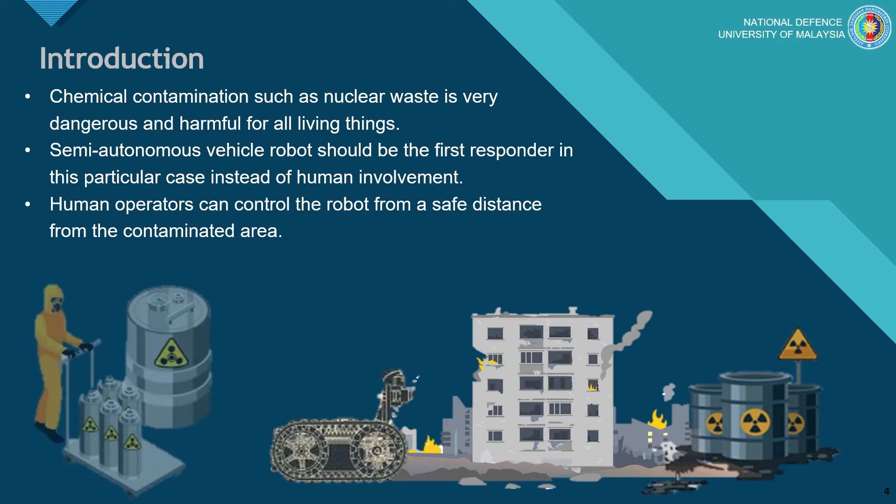In such case, a semi-autonomous vehicle robot should be the first responder instead of human involvement. This is because the robot is capable to perceive, grasp, cut, and manipulate depending on the type of chemical waste. Other than that, the tracked vehicle robot is capable of adapting to a variety of complex surfaces and environments. Once the waste was discovered, the substance can then be stored safely or disposed appropriately.

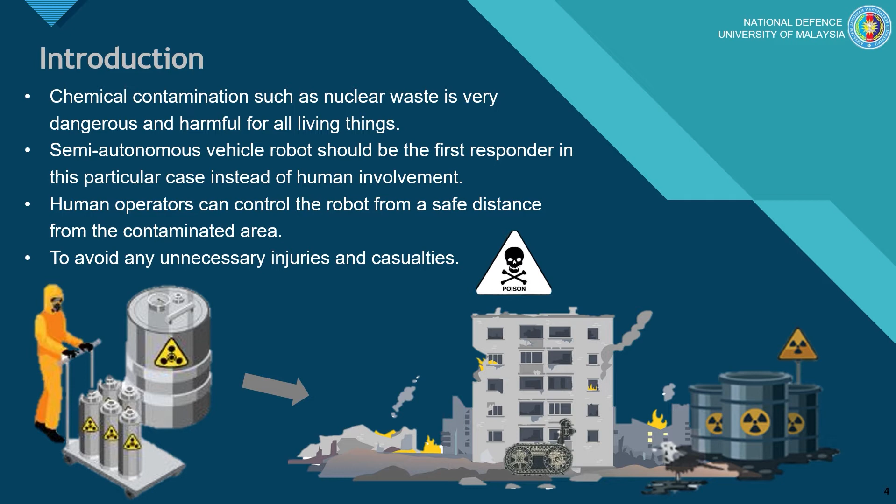On March 11, 2011, Eastern Japan experienced one of the worst earthquakes and tsunamis, causing heavy casualties and losses. In addition, the Daiichi nuclear power station was also damaged, resulting in the release of radioactive material. In such an event, the use of a remotely operated robot may be a good alternative as it can reduce the risk towards the human operators.

Problem statement. The technology to deploy remotely operated vehicles to replace human operators is readily available, but it must be equipped with enough capability to ensure good information can be extracted so accurate decision and planning can be executed successfully. One of the capabilities is to be able to maneuver on an unknown terrain, possibly harmful and compromised area.

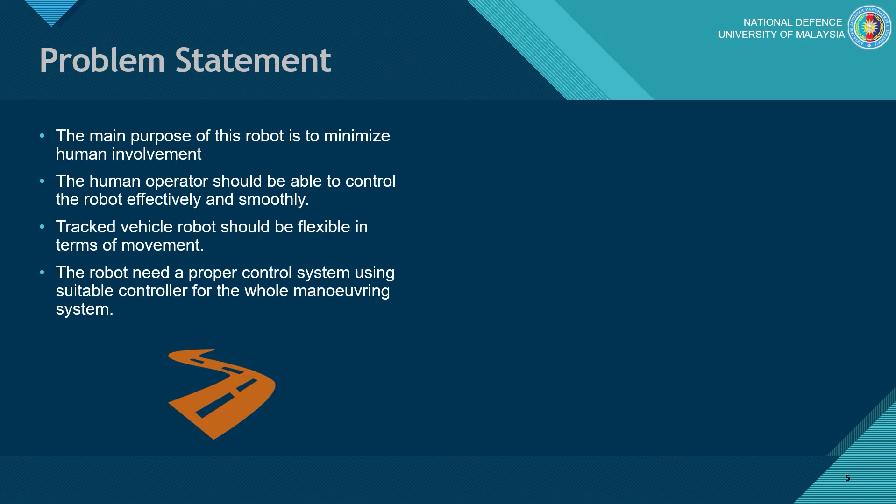Thus, the robot must be flexible in terms of its movement, so it can maneuver on various types of surface such as muddy, grassy or sandy terrain without compromising the outcome of the operation. In order to achieve that, the robot must be equipped with a proper control system by using a suitable controller. This is because one of the crucial structure designs of this robot is the control system for the maneuvering of the robot.

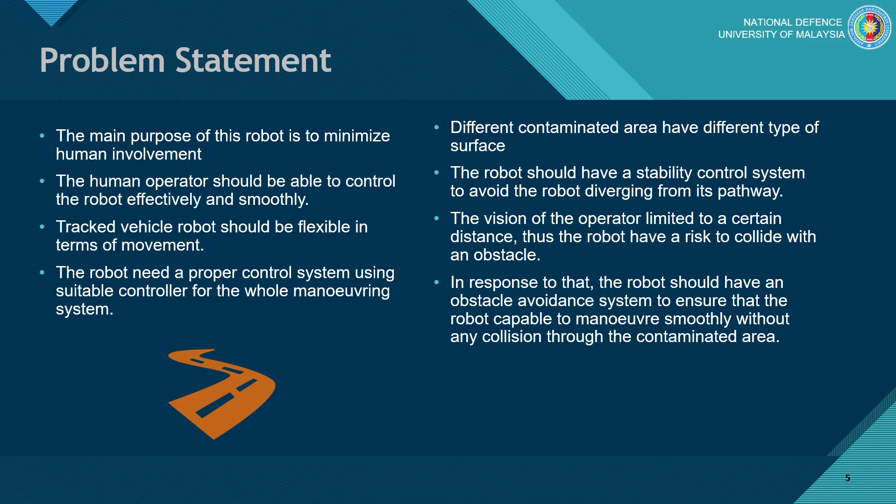In addition, this semi-autonomous robot must have the capability to steer away from obstacles. In other words, this mobile operator must also be equipped with an obstacle avoidance system. Finally, uneven surfaces will influence the level of stability of the robot and will affect the performance of the motors. Therefore, this semi-autonomous robot must be equipped with a stability control system which will enhance the capability of the robot to move and maneuver through various types of terrain.

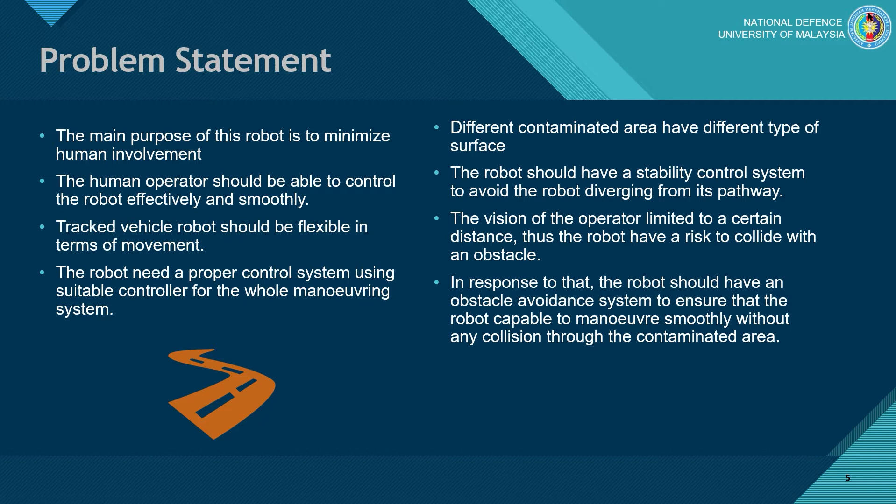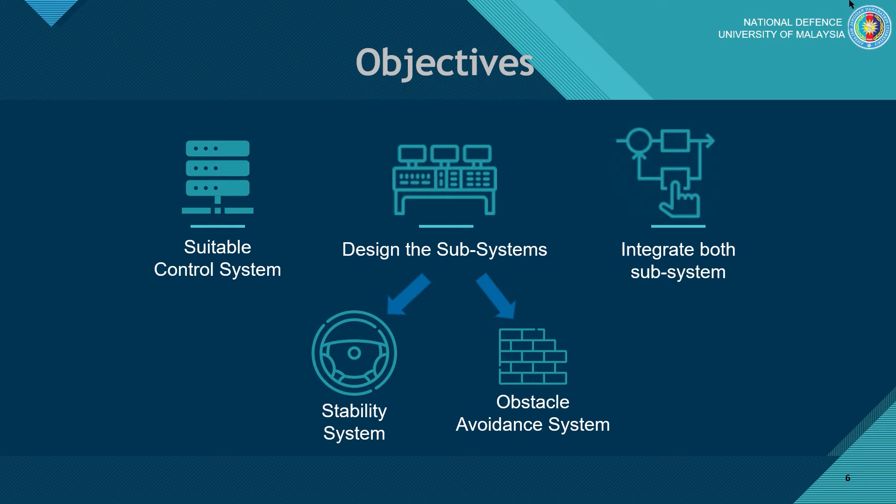Objectives. There are three objectives for this research project. First, to study and design the suitable control system for the whole tracked vehicle robot in terms of movement. Second, to create and design the subsystems, which are the stability system and the obstacle avoidance system. Finally, the third objective is to integrate all the subsystems with the main control system and evaluate the performance of the robot.

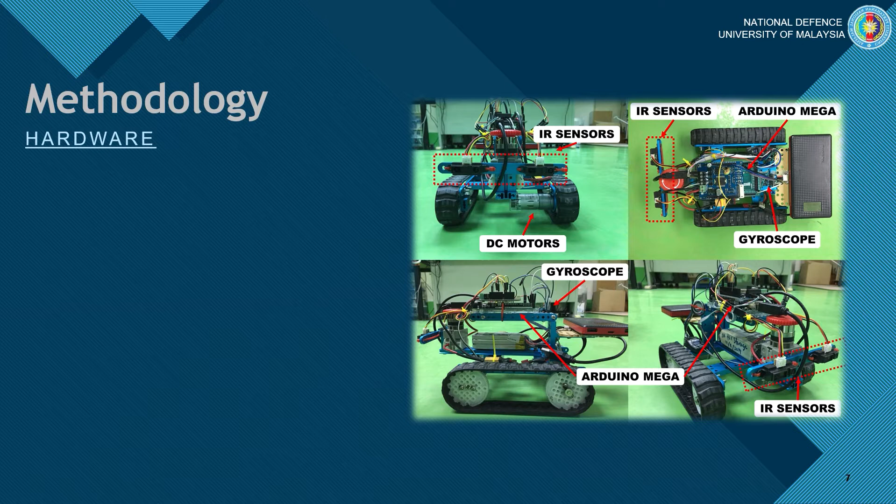Methodology. In this research, a downscaled fully functional tracked vehicle robot was developed and designed which consists of similar parts of an actual 200 kg tracked vehicle robot. All the electrical components such as sensors, microcontroller, and transceiver used on this tracked vehicle robot were chosen attentively and able to be implemented on the actual scale in the future.

The mechanical parts, on the other hand, are a simplified version of a tracked vehicle that consists of toy-grade materials, where the chassis or body frame is built from aluminium building blocks and the track assembly is made from rubber. The tracked vehicle is controlled by using DC motors connected to each side. The simple input-output relationship of the implementation is represented by the figure on the bottom left side of the slide, where Arduino Mega was used as a microcontroller for this tracked vehicle robot.

It is integrated with the two DC motors mounted for the left and right side respectively. Two infrared sensors were used on the robot to act as the collision avoidance system, while the gyroscope MPU6050 was used to provide real-time states of the vehicle's orientation to represent the stability system.

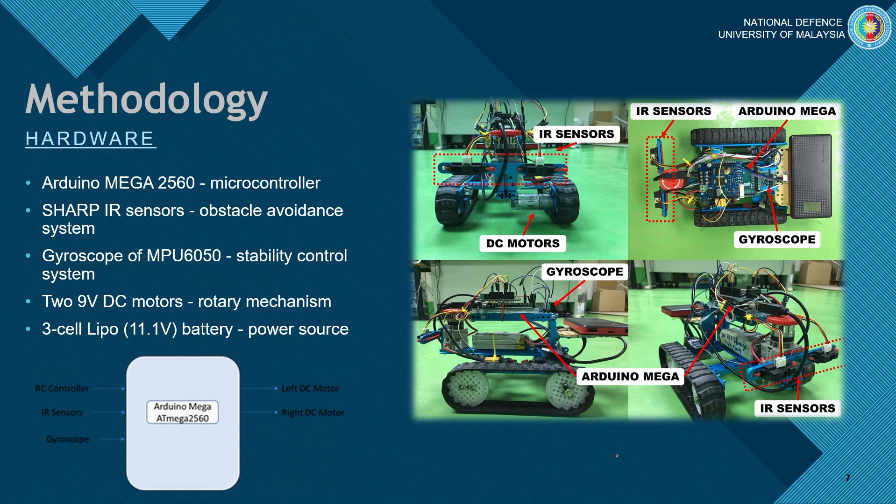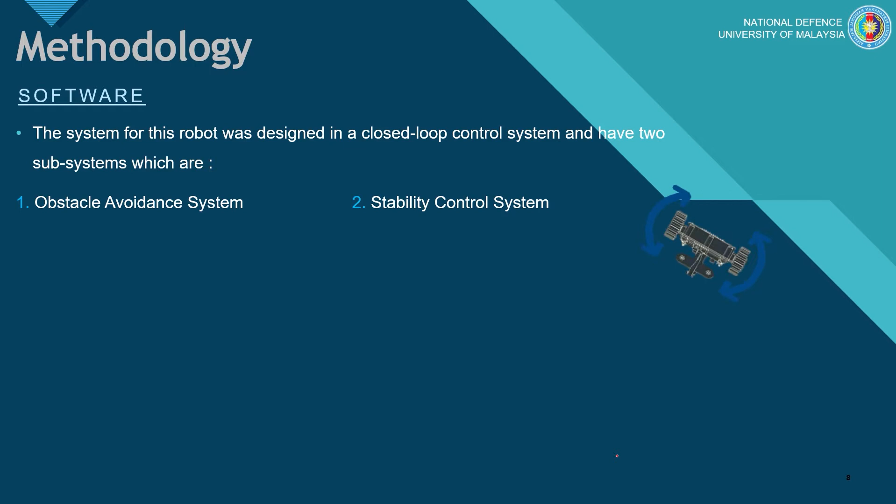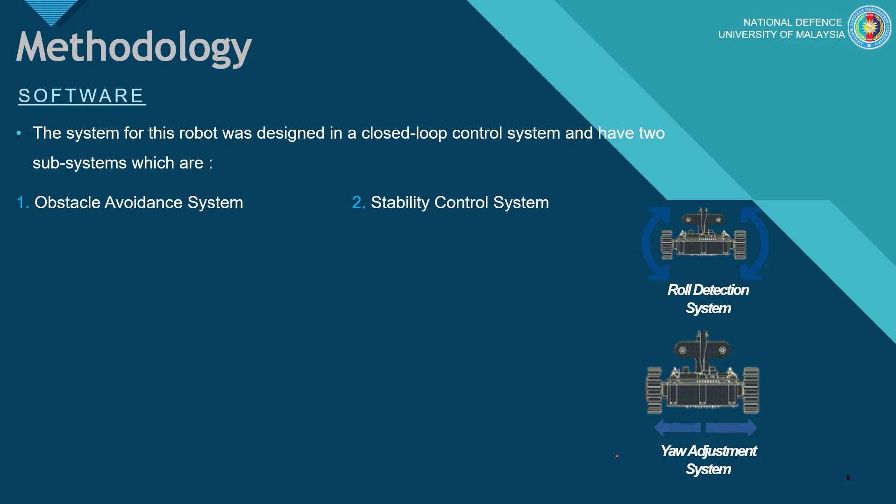The system for this tracked vehicle robot was designed to be a closed-loop control system which automatically regulates all the process for the collision avoidance and the stability control. Plus, the whole system for this tracked vehicle robot can be divided into three subsystems, which are collision avoidance, yaw adjustment, and roll detection system.

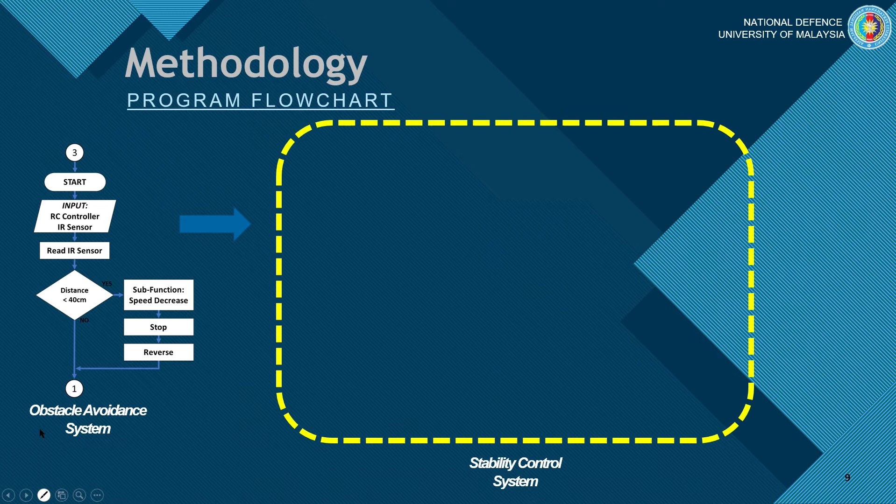Program flowchart. The program for the whole system on the robot can be divided into three flowcharts, and each flowchart process represents the three subsystems. In each process, there will be a requirement or a condition that needs to be fulfilled. If not, it will move on to the next process. The number in each subsystem symbolizes the continuity of the whole system.

The first one is the collision avoidance subsystem flowchart. If the IR sensor detected an obstacle located less than 40 cm from the robot, the process proceeds to a subfunction. In the subfunction, the input from the IR sensors will go through a PID process that will come out with an output, which is the speed of the DC motors. This output overrides the RC controller input. Then the tracked vehicle will reverse for 1 second and continue to the next process.

The second one is the yaw adjustment subsystem flowchart. The input for this system is the yaw reading of the gyroscope of the MPU6050 sensor. If the readings show positive or negative values, this indicates the tracked vehicle robot is diverging from its path and moving towards the right or the left sides.

So whenever the yaw readings are past the limit that has been set, the process will proceed to a subfunction which will undergo a PID process as an input. The output of this process is that the speed of the right or the left side of the DC motors will decrease depending on the yaw readings.

The third and the last flowchart in this process is the roll detection subsystem flowchart. In this process, the roll readings from the gyroscope are the input alongside the RC controller. There are two conditions in this case. The first one is when the tracked vehicle robot is in the warning level state, and the second one is where the robot is in the dangerous level. The positive and the negative values of the readings indicate that the robot is on an inclined surface on the right or the left sides of the tracked vehicle robot.

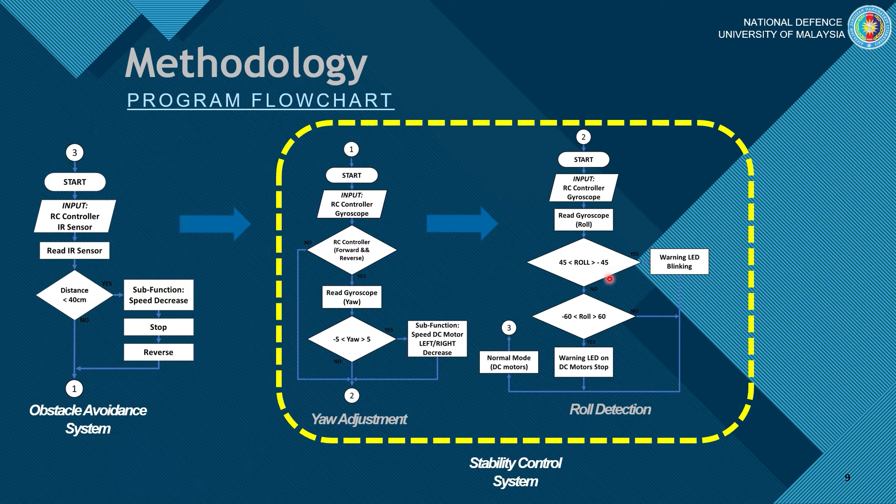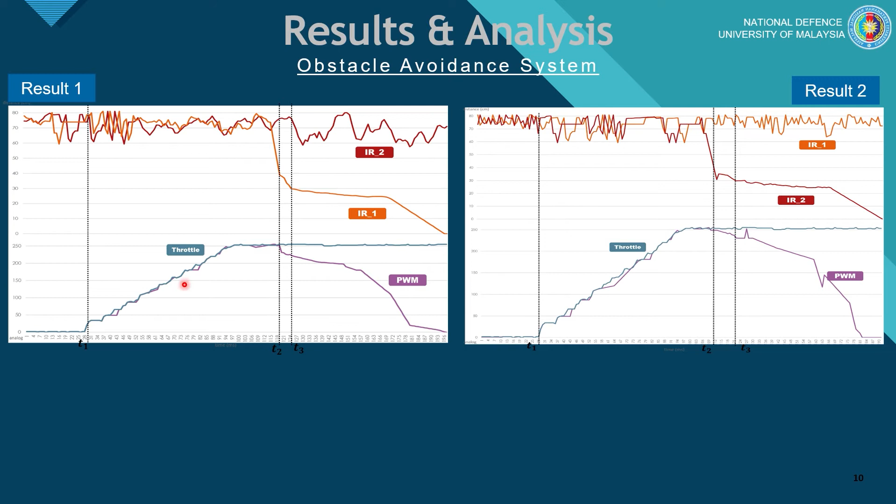Based on both graphs, the values of the throttle and PWM of the DC motors were almost the same. The throttle values can be considered directly proportional to the PWM values starting from T1. When the values of throttle input increase, the values of the PWM of the DC motors increase too. However, this process can only operate if the values of both IR sensors are more than 40 cm. The IR sensors act as the main input whenever the threshold, set to less than 40 cm, is reached; it will overrule the input from the RC controller throttle.

For example, based on the graph, starting from T3, as the IR1 value decreases, the PWM values also decrease. At this moment, the IR1 value can be considered directly proportional to the PWM values.

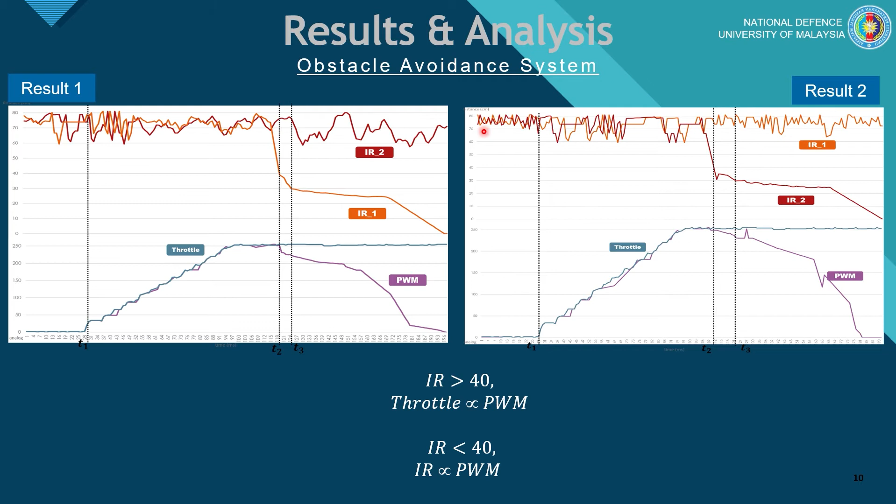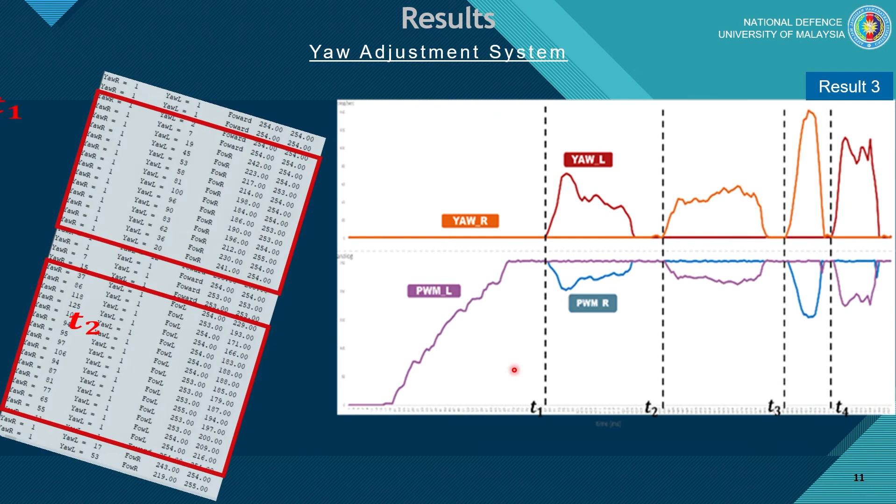In this experiment, the two cases were the two different input signals from the RC controller, which are forward and reverse input signal. The behavior changes at T1 and T2 occur when the tracked vehicle robot receives forward input signal from the RC controller. Meanwhile, T3 and T4 take place when the robot receives reverse input signal. At T1, the graph indicates the robot was yawing to the left side, and at the same time, the PWM of the right DC motor was decreased.

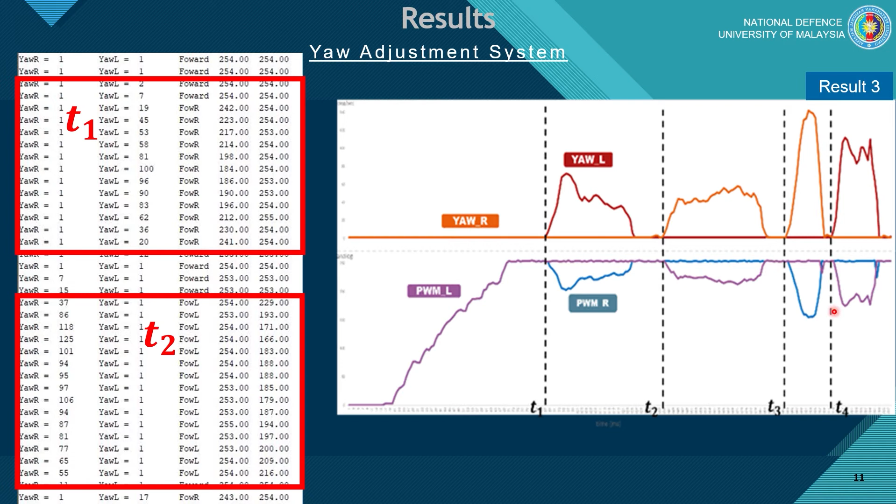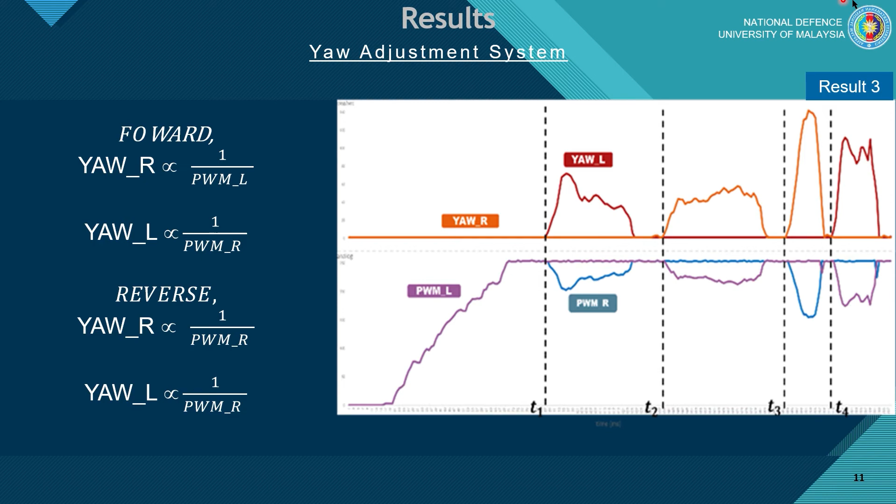The higher the value of the yaw readings, the lower the value of the PWM of DC motors. In addition, the graph shows the same behavior at every point. Whenever the robot is in forward movement, the yaw R and yaw L were inversely proportional to PWML and PWMR respectively. Meanwhile, when the robot is in reverse movement, the yaw R and yaw L were inversely proportional to the PWMR and PWML respectively.

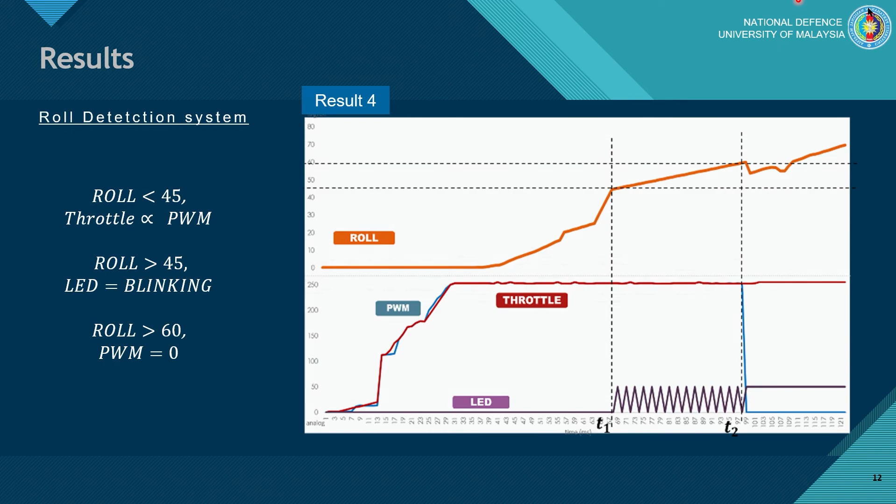Discussion. Based on all the experiments that have been carried out in this research project, for the obstacle avoidance and the yaw adjustment system, the result shows that it takes less than 1 second for the infrared sensor and the gyroscope of the MPU6050 to interrupt and replace the initial input value for each system, which is the throttle value from the RC controller. This low response time was an indicator that this system had a good performance time, where the desired output from the sensor reached the desired value within the time expected.

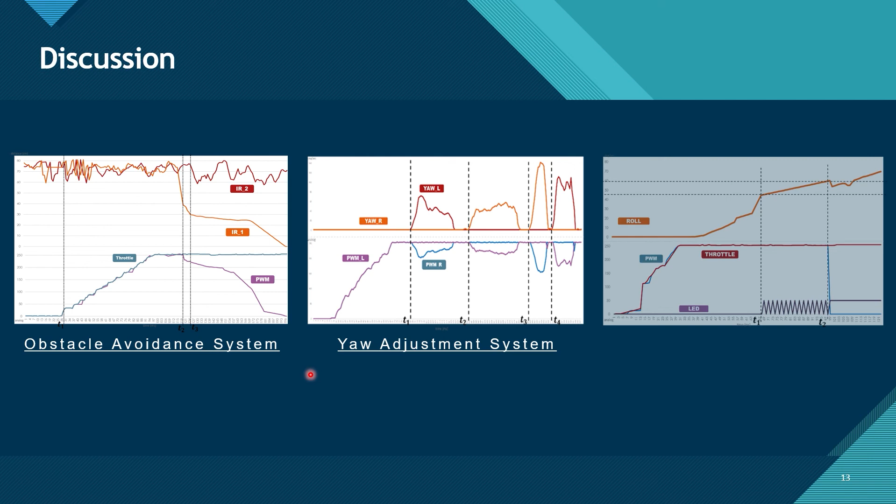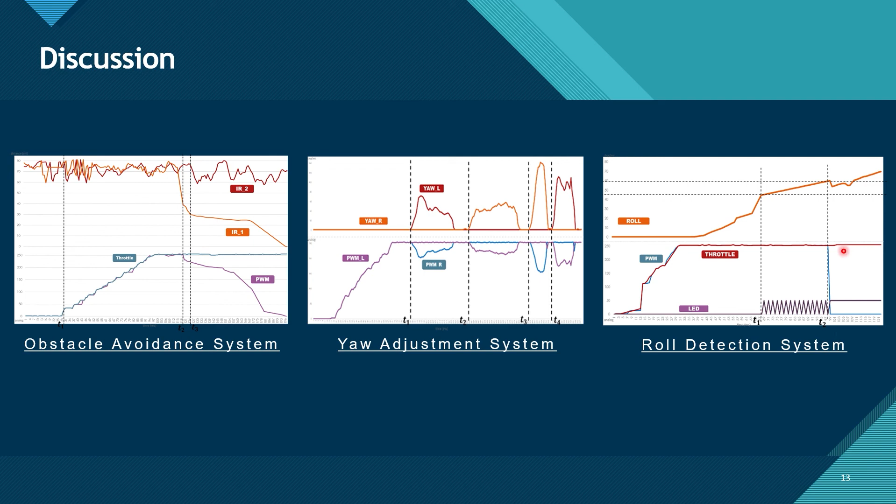Meanwhile, for the roll detection system, although the output of this system achieved the expected value and response, a sudden stop from a high-speed maneuver will induce a jerk, which is not good for traveling vehicles. This rule applies to any vehicle that exists in this world. Therefore, this system needs an improvement that can prevent the tracked vehicle robot from damaging itself. For example, jerk reduction. This will make the robot slow down gradually and eventually stop within the desired time.

In conclusion, this paper presented a design-based research for the maneuvering control and obstacle avoidance system of a tracked vehicle robot. The maneuvering system consists of two separate subsystems that enable the operator to maneuver the robot efficiently. However, some improvements can be further explored in order to improve its accuracy and precision during operation, especially in terms of the dynamics of the sensors. Basically, all these subsystems can be used as a precautionary measure for any vehicle-based robot.

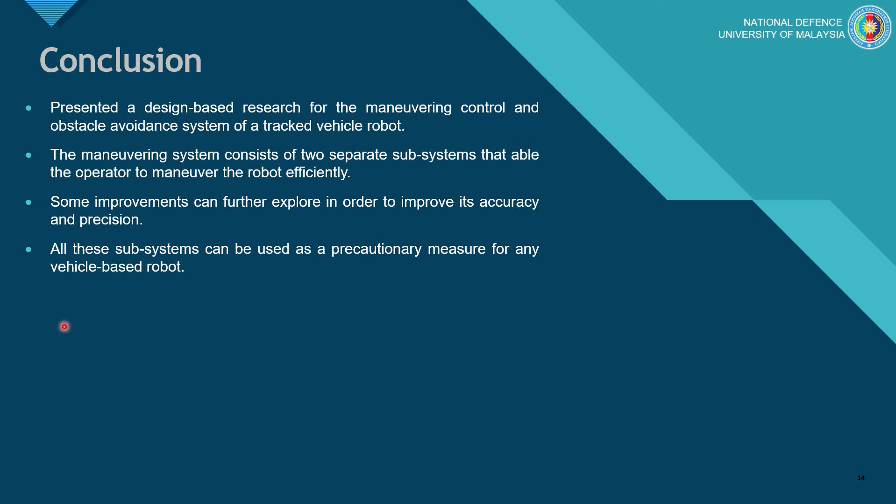With the proposed features in the small-scale tracked vehicle robot, it facilitates the operator to maneuver and operate the robot safely and effectively. The next phase of this work is using the proposed control system along with its subsystems presented in this work on a real-scale remotely operated 200 kg tracked vehicle that allows for more payload to be implemented. It is expected that during this stage, only minimal adjustment is required in order for it to perform during actual operation. With that being said, I have now come to the end of my presentation.